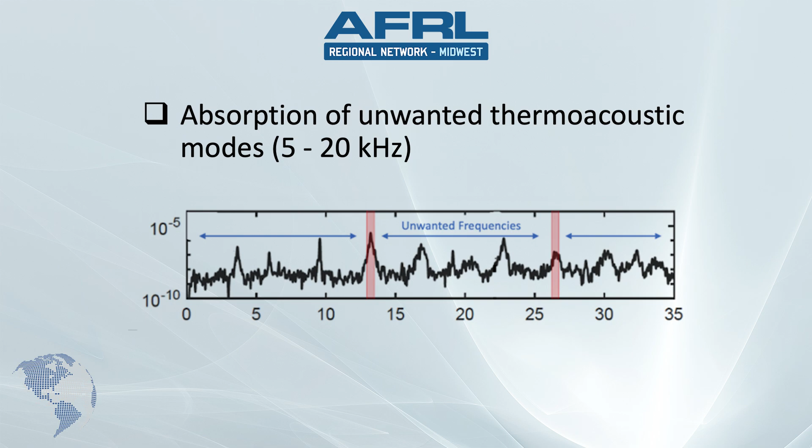The philosophy of what we do at HySonic focuses on wave control. The company has been involved in external flow control, so controlling waves that naturally occur on the external shell of a hypersonic vehicle. And these waves are typically in the range of 100,000 to a megahertz, so very high frequency waves. But we've also been applying the same philosophy, same tools, same skill set to internal flow control, specifically in the propulsion system of hypersonic vehicles.

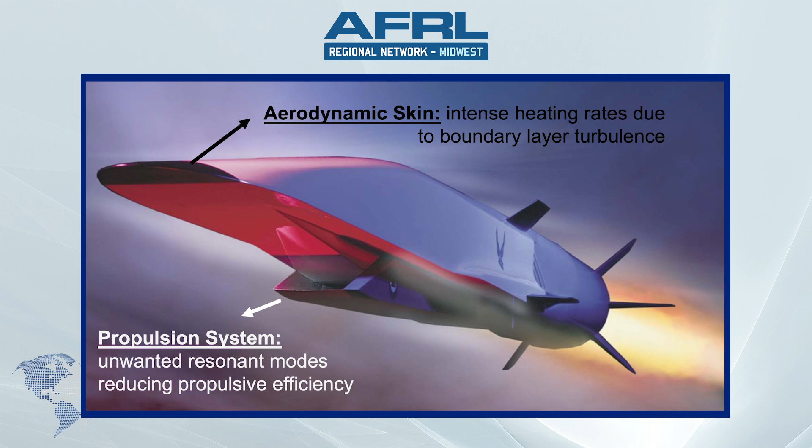The AFRL Regional Hub is interested in advancing the TRL level of our technology as it pertains to external flow control. During the first increment at HySonic Technologies, we were able to develop and improve an ultrasonic bench test capability that allows us to characterize the acoustic absorption capabilities of potential aeroshell materials. Hypersonic missiles suffer from an acoustic phenomenon that causes early laminar to turbulent transition. By using a HySonic Technologies aeroshell material, we can delay that transition and improve its flight performance.

In my hand, you see one of the samples that we're going to be using for the next increment here. These porous samples allow us to validate our bench tests in order to characterize these materials. The next step will be for us to place these samples in a thermal environment so that we can understand how that thermal aeroshell environment is being impacted while flying at high Mach numbers.

I'm happy to report two major breakthroughs that the HySonic team made in the last few months. One was towards the end of the first increment, where we have designed, purely computationally and with some heuristic knowledge, a new form of control that out of excitement was immediately tested at the Air Force Research Labs, and its effectiveness was confirmed by experimental data. This breakthrough number one can be attributed to the first increment of our effort.

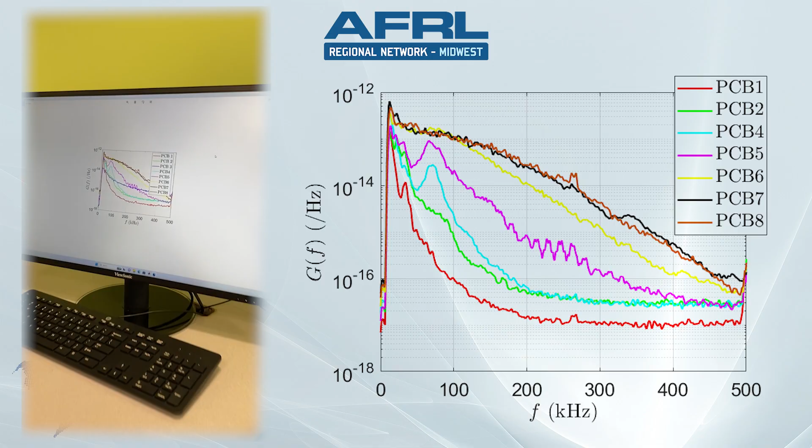We also had breakthrough number two, and that was a recent award by the DOE for a very prestigious supercomputing allocation that will allow us to further strengthen and increase the fidelity of the computations that led to breakthrough number one.

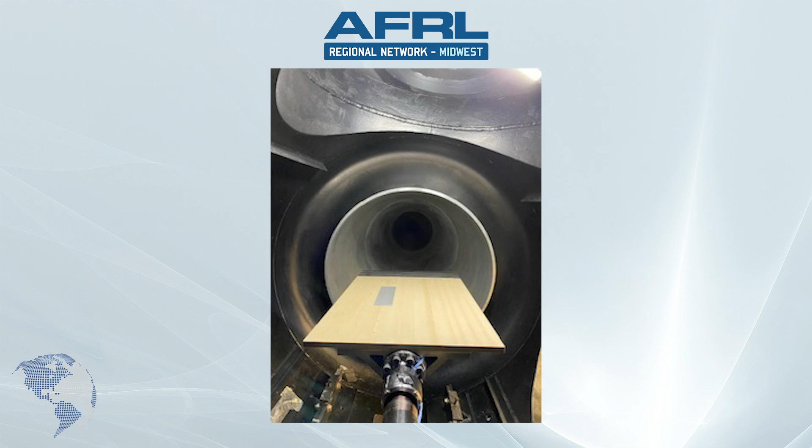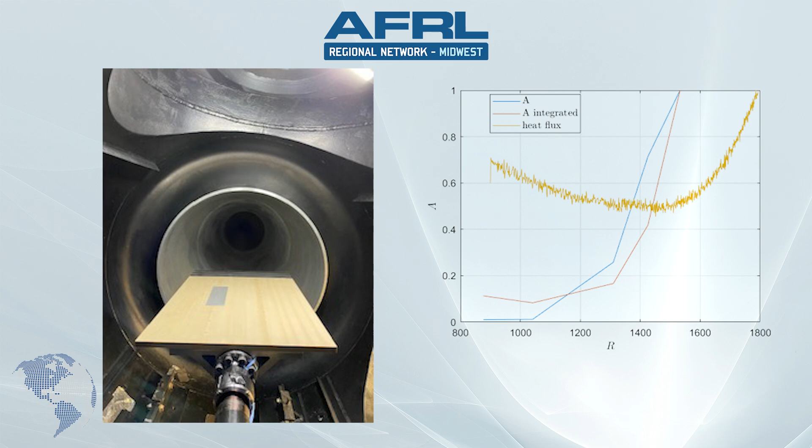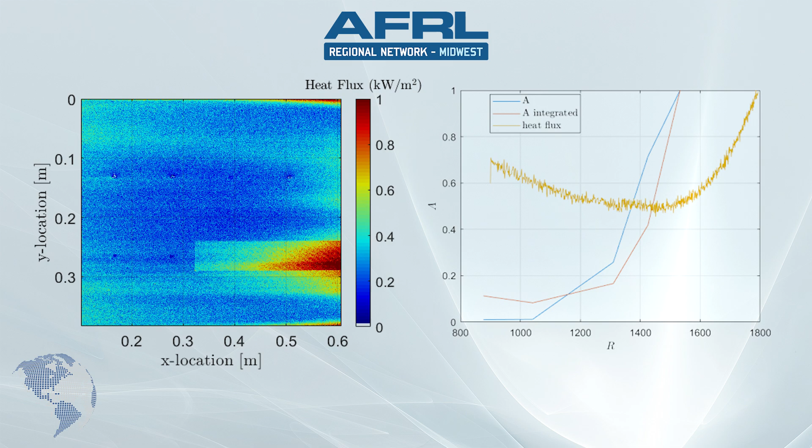But what's interesting about this particular test article is it also allows us to identify boundary layer transition via another common metric, which is infrared thermography, specifically surface heat flux. That yellow line along the same axial location along the model indicates an abrupt increase in heat flux much farther downstream than the PCB surface pressure sensors, which opens up a totally new, interesting avenue for exploring the underlying physics of this particular mechanism of boundary layer transition that we and our Air Force colleagues are extremely excited to explore in more detail.

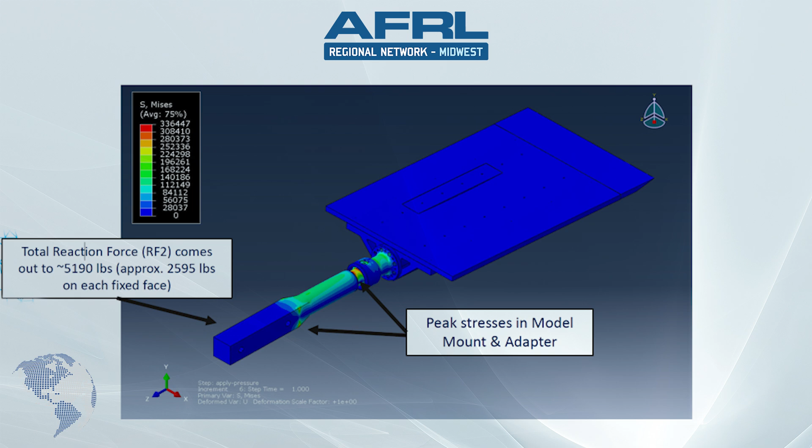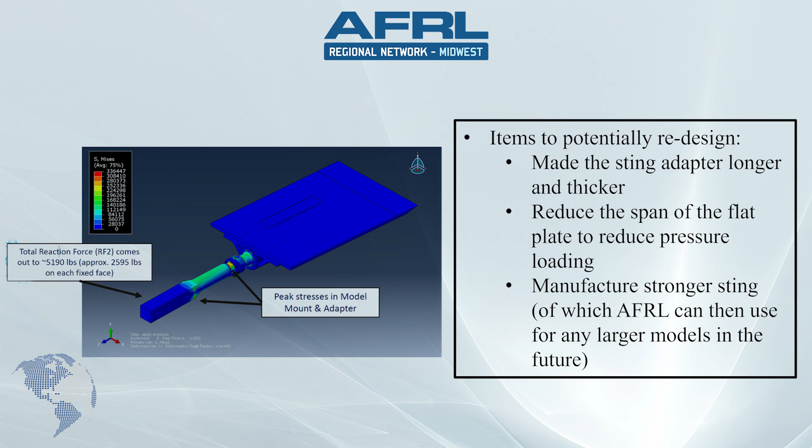In my hand here, we have a low porosity sample. We use stainless steel samples that have cylindrical pores in them with a known depth and diameter used to calibrate and refine our ultrasonic absorption bench test. This low porosity sample has fewer holes than the high porosity sample, but it has the same nominal diameter, depth, and pore diameter.

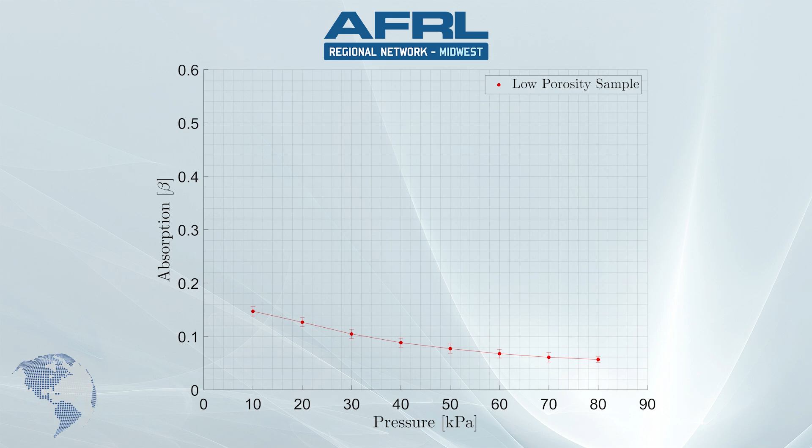If we take a look at the experimental plot here, you can see the experimental data is given by a red dot that has an error bar. This error bar is calculated by taking this test over and over again and finding out how repeatable these results are, 2 times the standard deviation to be particular. Now we see that we have a lower theoretical bound and an upper theoretical bound.

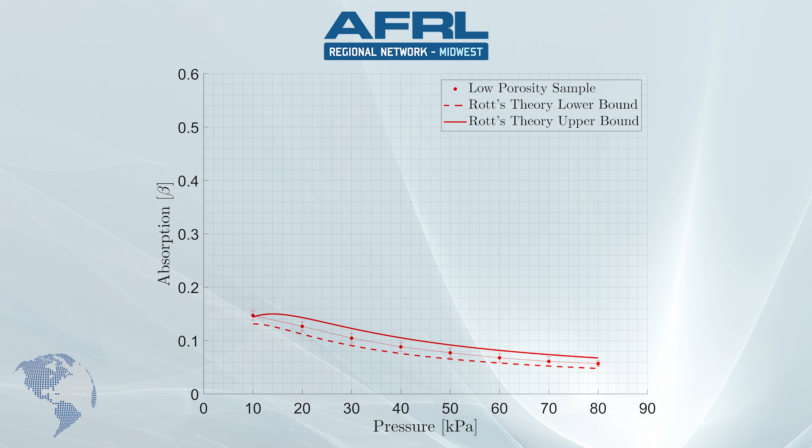Rott's theory is a theory in fluid mechanics that is based on the Navier-Stokes equations and applied to this kind of acoustic environment. The lower bound simply represents the nominal pore depth of this sample with a minus tolerance, and then the upper bound represents the nominal pore depth of the sample with a positive tolerance. And what you see is that the difference between the depths for these 2 curves is very little, 0.06 millimeters, which shows that our experimental data is falling right in between the nominal depth within plus or minus a certain tolerance.

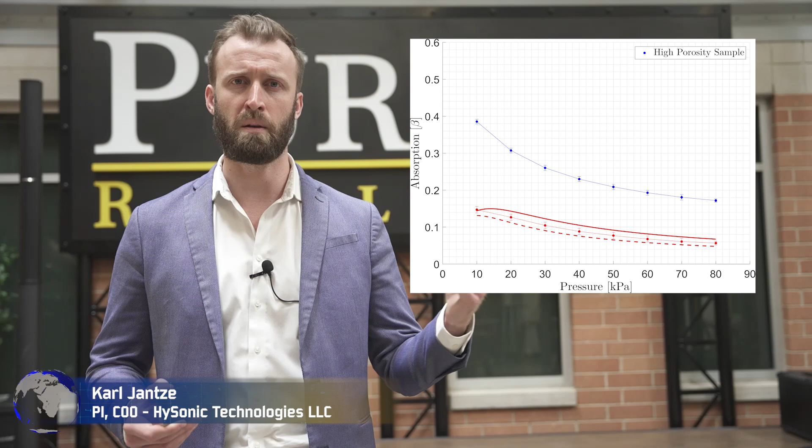In my hand here we have the high porosity sample, and similar to the low porosity sample, it contains pores that have a certain diameter and depth. The only difference is that it has more pores, allowing there to be a greater surface porosity. Very similarly, if we take a look, the experimental data is given by a blue dot that has an error bar, also representing the repeatability of these results. The lower curve and the upper curve also represent a certain tolerance above and below the nominal pore depth.

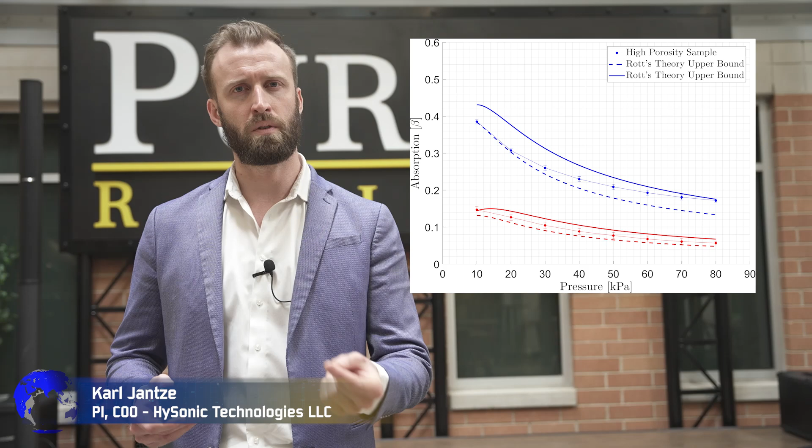And what that implies is that based on the pore depth of the sample operating at this frequency, you're going to get different absorption results, which means that we can tune these depths for certain acoustic frequencies that we wish to target. And that kind of knowledge will help influence how we will design flight grade materials that have more arbitrary geometries, but can have an effective nominal pore depth involved.